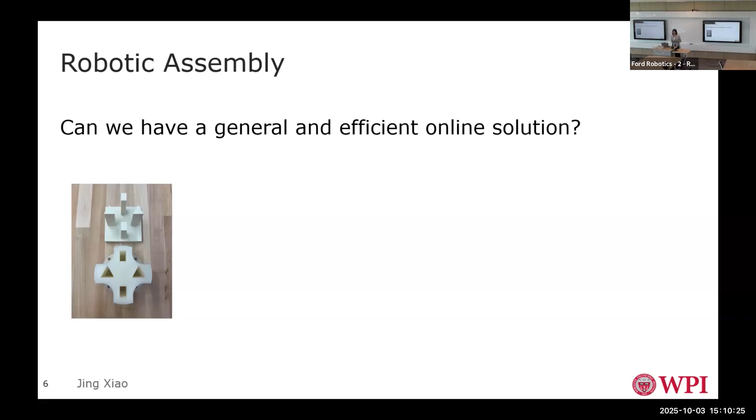So the problem for robotic assembly is: can we have a general and efficient online solution, especially for more complex situations, not just a round peg and hole? Many years ago, 40-some years ago, we already had the remote center compliance device for that particular type. But for more general assembly types, can we still have that solution?

Our experience shows that the key to that is efficient representation of contacts, perception with learning, and constraint search. The combination makes that successful.

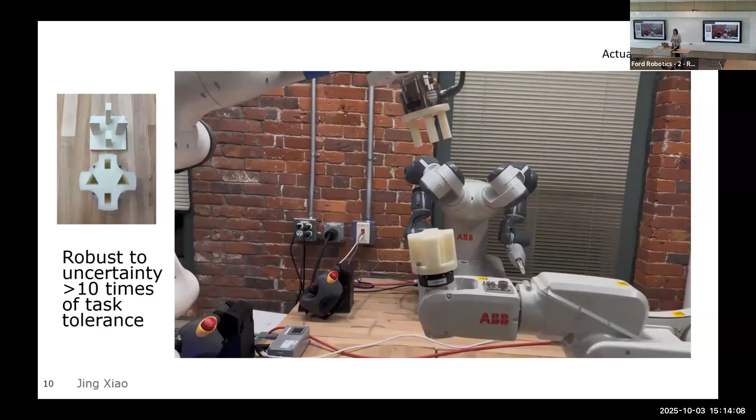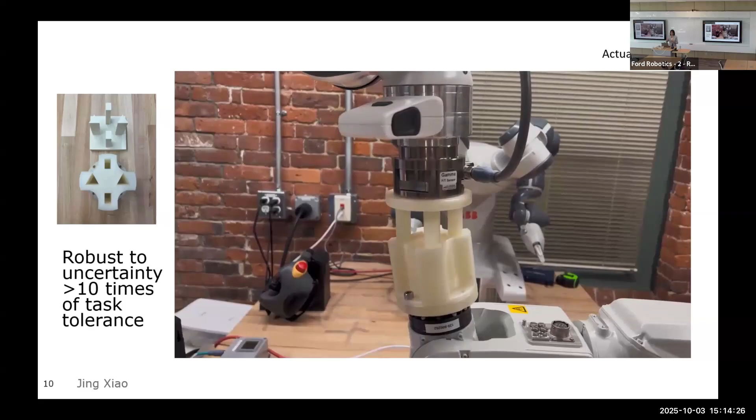This is actual speed, and we deliberately introduce uncertainty in this peg-in-hole assembly task, for example. So it results in some contact, and we do prediction of contact configurations and try to correct it with the prediction. This is robust to uncertainty more than 10 times our task tolerance.

We close the loop—we use that to compute the contact force and torque, and try to match the computed contact force torque with the sensed contact force torque. Of course they're different, because the computation has a lot of simplification, inaccuracy, and modeling error. But with the force calibration network, we can handle that. If this matches, we go to the next loop, which is to try compliant motion.

If it works, great—we execute compliant motion and the assembly is successful. If the tried compliant motion is not successful, that shows the contact state, although close to the force torque information, may still be estimated wrong, maybe a local minimum or something. So we do the loop again. If the robot, during compliant motion, gets stopped somewhere else because the assembly can be rather complex, we do contact detection again and try the whole thing again.

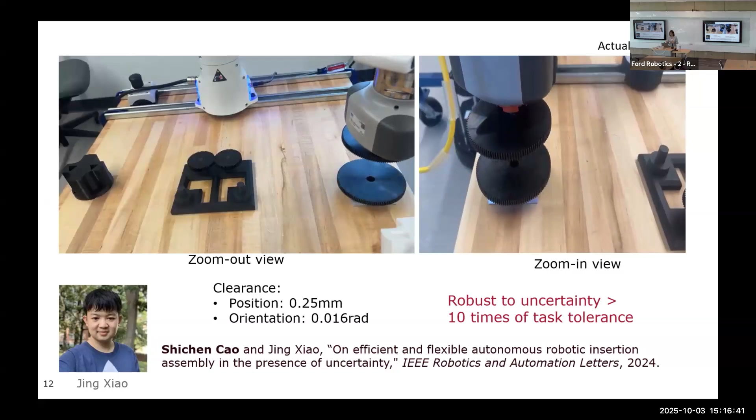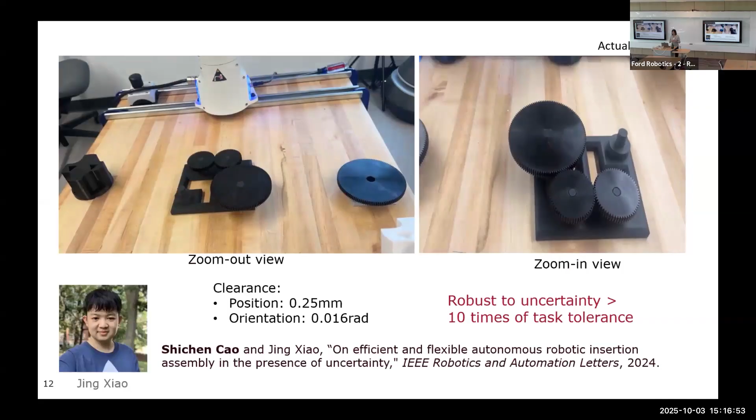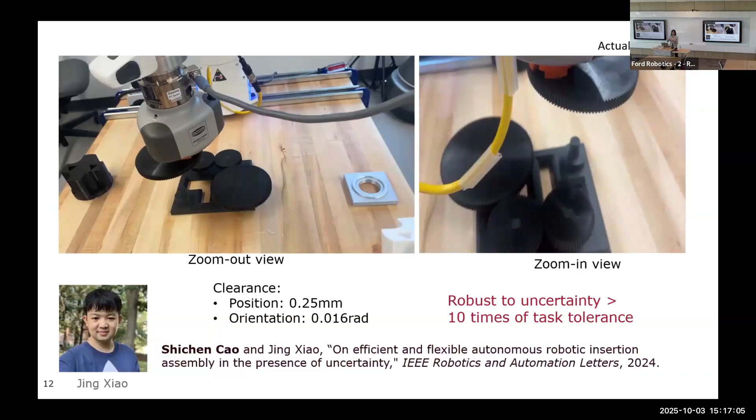This is very nice—in this gear assembly situation we have a large gear with 120 teeth, very complex, and a small gear with 60 teeth, and they need to mesh well. We also introduce uncertainty here—you see we have a vacuum gripper, which can grasp the gear anywhere, not necessarily precisely at the center. So grasping uncertainty is there too. All of these uncertainties can be handled in our approach.

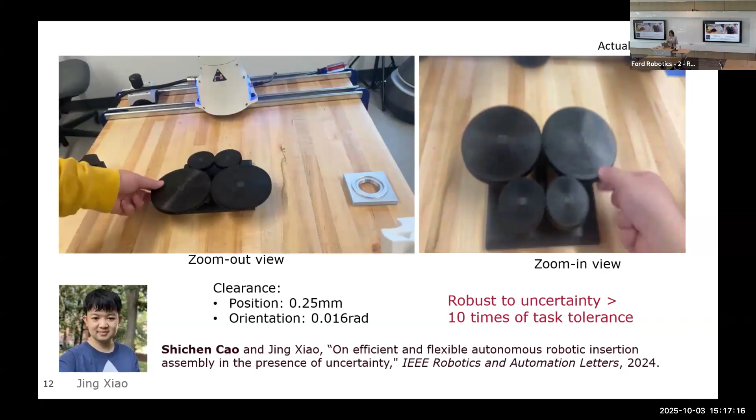And the last gear—you see multiple contacts, and they also move; it's not rigid, it's an articulated object. The clearance is very small, a quarter millimeter, and the orientation tolerance is also small, but the operation is always successful. This was done by my former PhD student, Shichen Cao, who just graduated this August and is now with Meta's Foundation AI group.

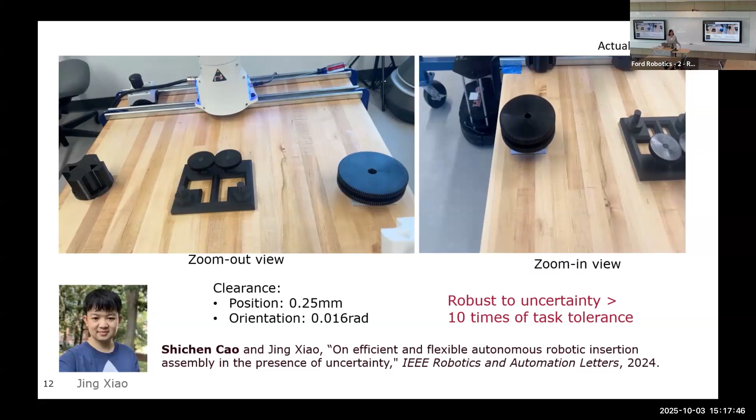So somehow they all ended up at my students. Last year, another student went from Mountain View to Meta.

So anyway, now we have this great technique for insertion with sensing, very robust for tight insertion tasks. We asked, how about if objects are not known? How about if we do real-time dense packing of novel objects?

We use RGBD perception to quickly sense object point clouds, build our sphere tree model, and estimate object pose. Then we do dense packing planning, which is more algorithmic - maximizing space and optimizing the motion path.

Especially important, this doesn't have to be accurate, because our last step can always handle the uncertainty. So perception, planning, and execution all just run in loops, at frequency. These are concurrent, so it's very efficient. When something is perceived, it can immediately go to planning and execution, but these modules work constantly.

Imagine all the objects on a conveyor, in the packing situation, coming in. So the objects come continually, and the perception system works, and packing is done continually.

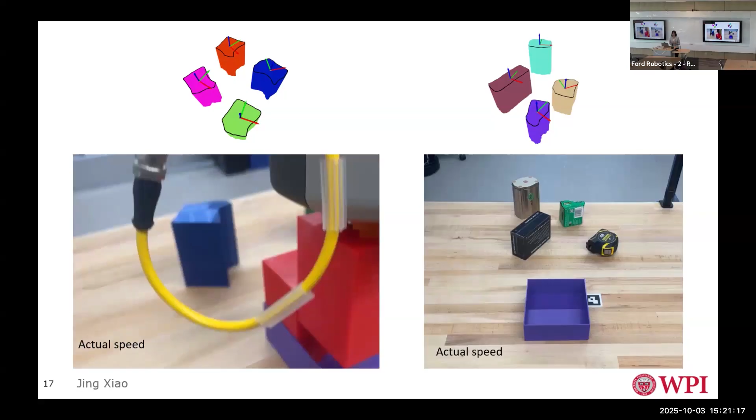They're not polyhedral. With this, from perception to action to actual packing planning to execution in this tight container, the robot will eventually figure out it's a puzzle to fit everything in. The last piece is the most difficult, but every piece has some uncertainty and contact that has to be resolved.

And this is again actual speed. On the right side, these are just arbitrary objects we purchased from Walmart - real objects, no model whatsoever. So it's everything based on perception.

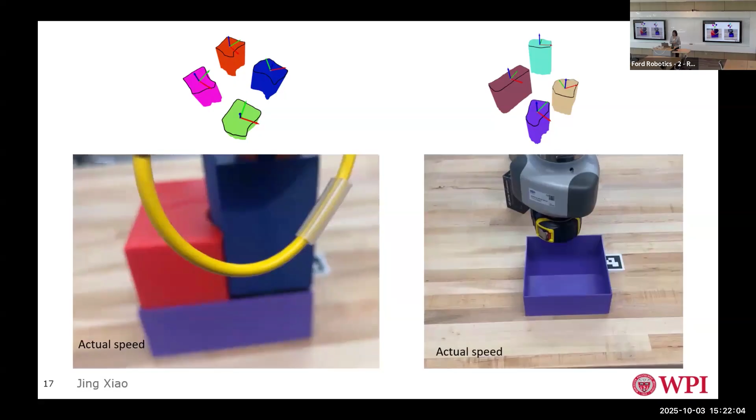There are more objects than the container can fit, so the packing planning has to decide which objects can fit. There's a lot of research on packing planning, but usually it's 2D, done by computer scientists, usually in simulated environments, usually with very similar objects like boxes of different sizes - not arbitrary objects, and not actual execution by robots.

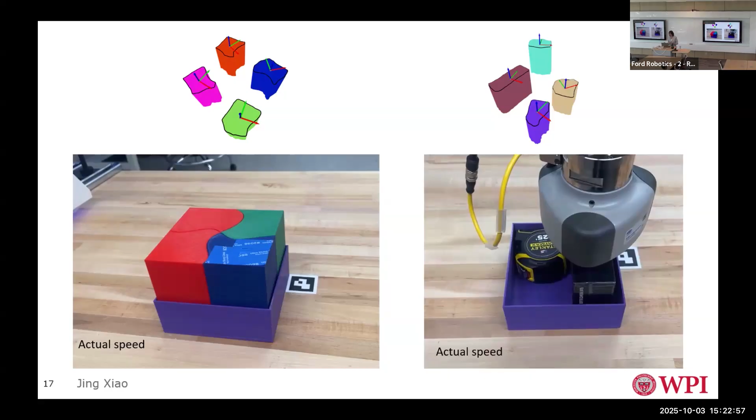So now we considered - let me show this at actual speed. You see, it has to do some estimation a few times to get it in.

You see, that's again very fine manipulation here for insertion.

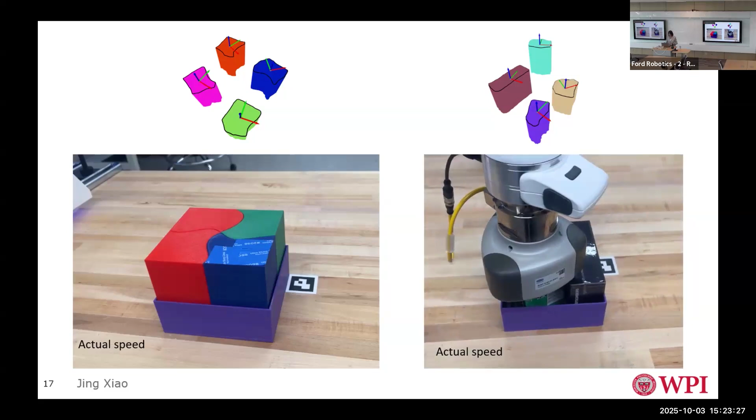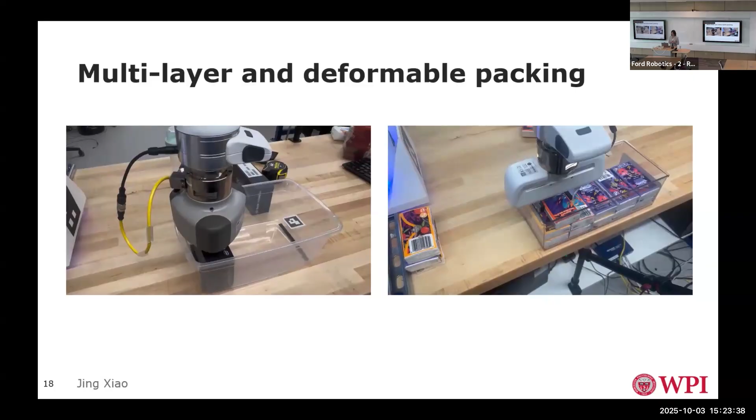We also have multi-layer packing because this is 3D, not planar. So we can do multi-layer packing when there's enough space, calculating the no-fit volume and available space for dense packing. On the right-hand side, you see we don't use a vacuum gripper, just a parallel gripper.

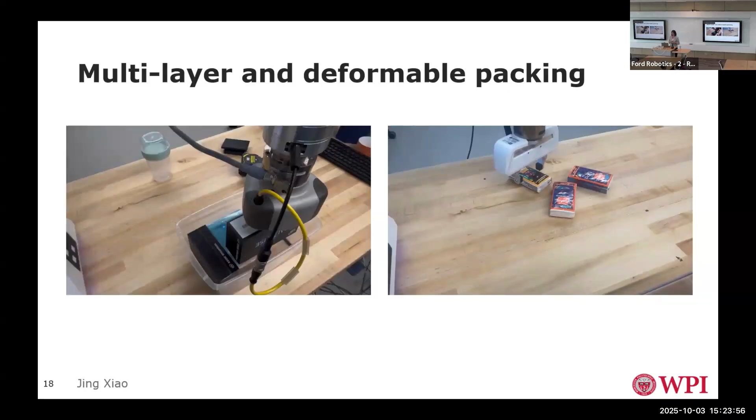For packing these tissue bags, they are even deformable, and we model this to handle some deformation. So deformable objects can be packed too.

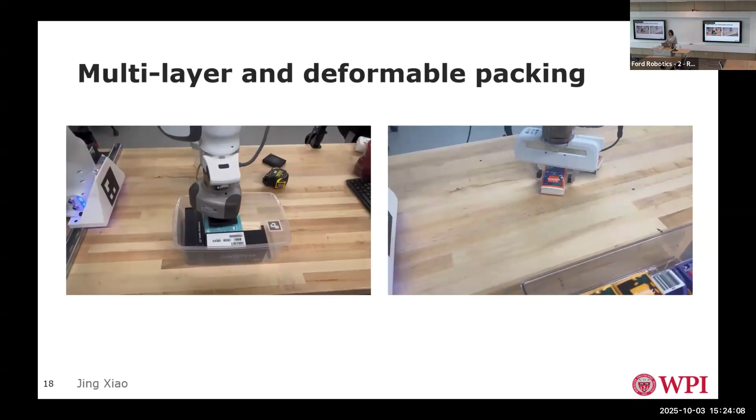Also, these objects come in piles - they don't have to be nicely separated. So the vision system will just detect the objects, see which ones are most visible, and start from there to detect and do packing.

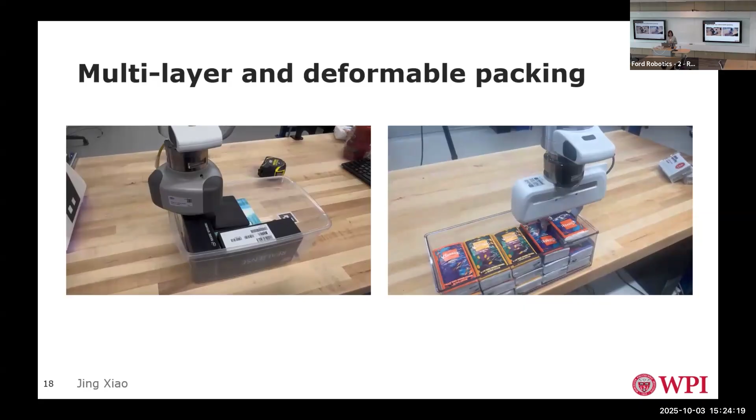We did a comparative study with recent work. Very few papers address packing novel objects with physical execution, but there are some related works we compared against.

This started from my PhD time, but only recently we got a more general, very robust and general solution. We really can make it work for all kinds of situations.

This is a more recent work on online deformable object manipulation. The idea is to just have perception, in this case an RGBD camera. This is done by a current PhD student of mine, with a very tight perception-action loop, no simulation, no object modeling.

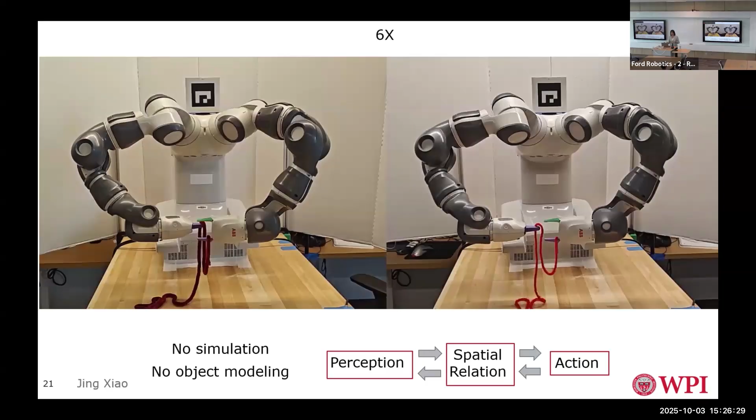With built-in robustness, the idea is: we start with a description of the task. This can consider not just pure low-level motion planning, but task planning, a different description of the task. We translate this into a sequence of spatial relation transitions between the robot and the target object.

We use perception to detect if the spatial relation is as desired, then we continue this motion until the task is executed. If it's undesired, there's a corrective motion. You can see in the previous video the grasping took a few tries because this is robust to handle errors.

Perception again uses learning, for segmentation of these deformable objects in that environment. That's a very important piece.

We have two kinds of motion. Perception motion adjusts or moves the robot or camera to give a better perception. Like on the left-hand side, you cannot see the red ribbon and finger, but here you can, so by changing the aspect, that's one kind of motion.

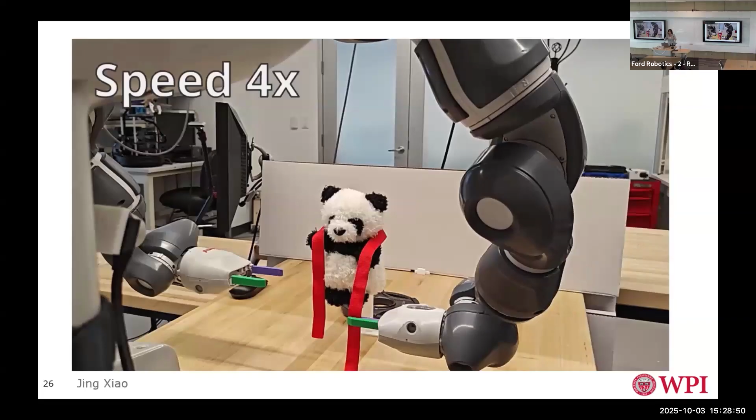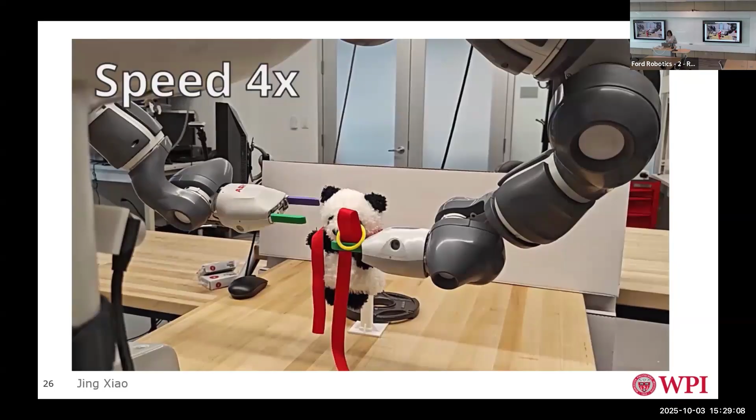Here is the task of tying a ribbon on a toy panda by bimanual manipulation, again following this whole philosophy of perception and action synergy. This one is slower than the assembly task, and more complex.

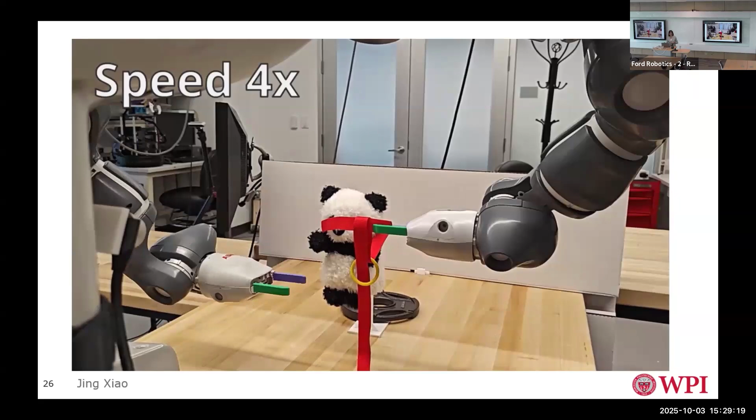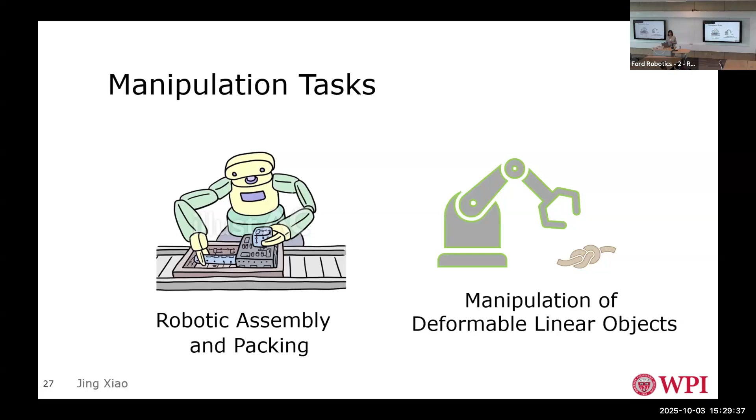So I've talked about two kinds of manipulation tasks, assembly and packing, and also manipulation of deformable linear objects. They all follow the same philosophy of perception to detect states with some learning, then constrained search and compliant motion if needed in contact-rich situations, to finish the task.

Now I'm going to switch gears a little bit to talk briefly about search and exploration tasks in unknown environments: search of semantic objects in unknown domestic indoor environments, and visual coverage of structures, which could be indoor or outdoor.

For the first task, autonomous search of semantic objects, we consider autonomous online exploration by a mobile sensing robot of unknown environments. For this type of work, we need a lot of capabilities: mapping, localization, reducing map uncertainty, planning with uncertainty, goal forming online on the fly, semantic priors, and a lot of related research.

Active SLAM does mapping, localization, reducing uncertainty, and goal forming. We have very strong research on SLAM here in Michigan. Next best view is for 3D reconstruction purposes, and considers localization of the robot, but doesn't really consider planning explicitly.

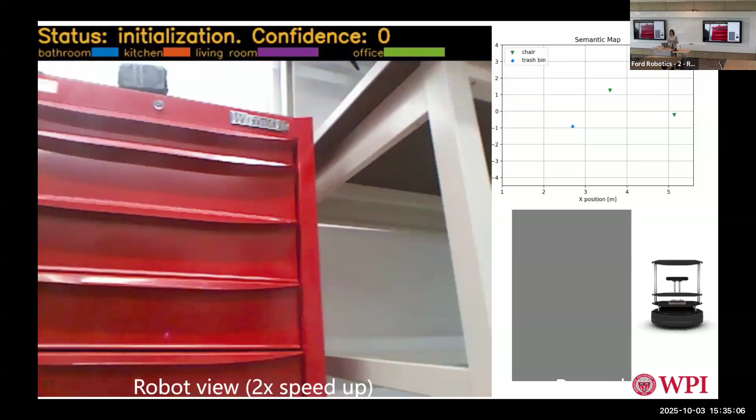It's very messy, so it's impossible to model it beforehand for a robot to move through. So we have to do simultaneous SLAM and object searching.

In this case, we try to find somebody sitting on a chair. It saw a lot of chairs but didn't see anybody sitting on one, so it keeps searching. This shows the semantic map of the meaningful objects, and this is the low-level geometric map. It's just a TurtleBot, nothing fancy.

So it's more optimistic than usual SLAM. Usual SLAM, you want to build a map. Here, the goal is not to build a map but to find an object. But you still have to build a map, because you want to reduce uncertainty. You find the landmark, and you try to find the objects. So yeah, it's getting there.